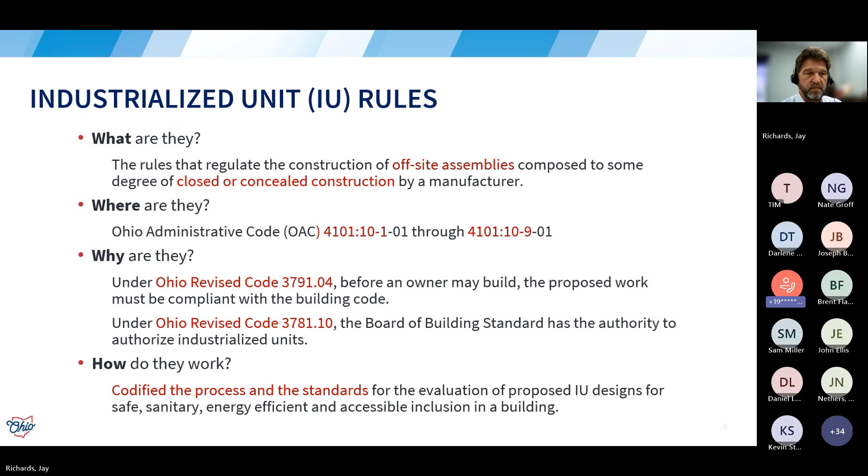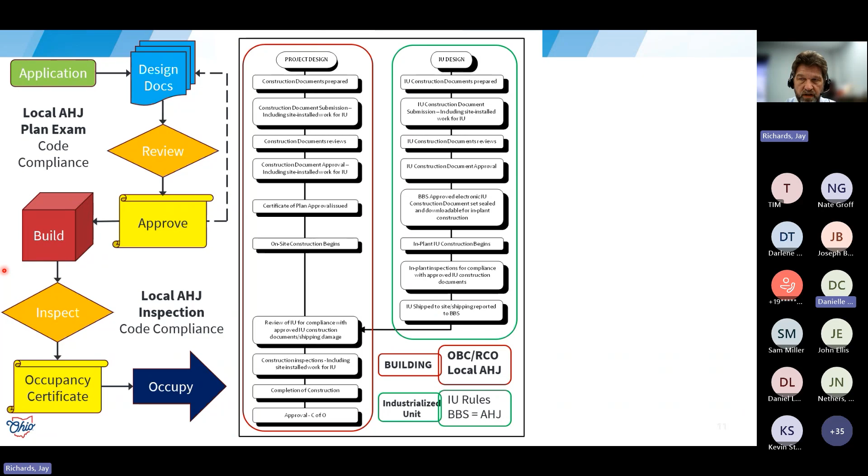Once all those inspections are satisfactory, a certificate of occupancy is issued for the owner to be able to occupy that building, and that allows them to make use of that building. That includes the installation of an industrialized unit. So you can see that the processes are very similar. We were trying to be intentional about that, because we're complying with the same set of codes, those same requirements, and it's ultimately going to all end up as part of a building. We wanted to keep those processes as similar as possible.

So this is a flow chart that I developed to help me understand where it all comes from. We have Ohio law over here that gives authority and responsibility to building departments, the Board of Building Standards, and actually has requirements for owners as they're looking to construct, that they have a process to go through. Ultimately what the owner wants to end up with is down here, a certificate of occupancy, that what he's proposing to do is safe, sanitary, energy efficient, and accessible.

Now, along the way, he has to make sure that he's using either listed and labeled products or alternative materials or an alternative engineered design. But the model codes don't really take into account, at least not yet, they're working on it, that concept of offsite construction, these industrialized unit models.

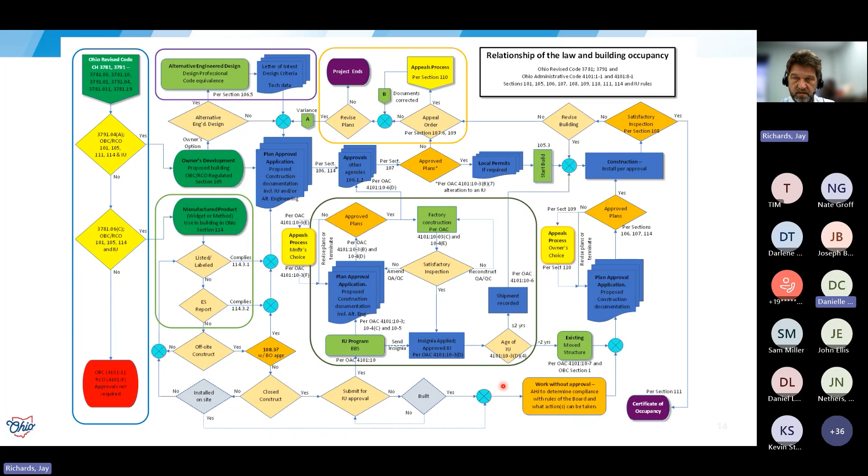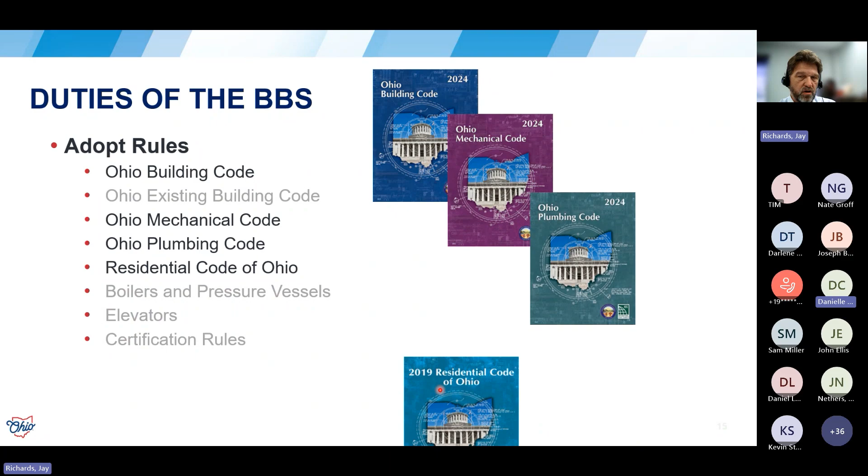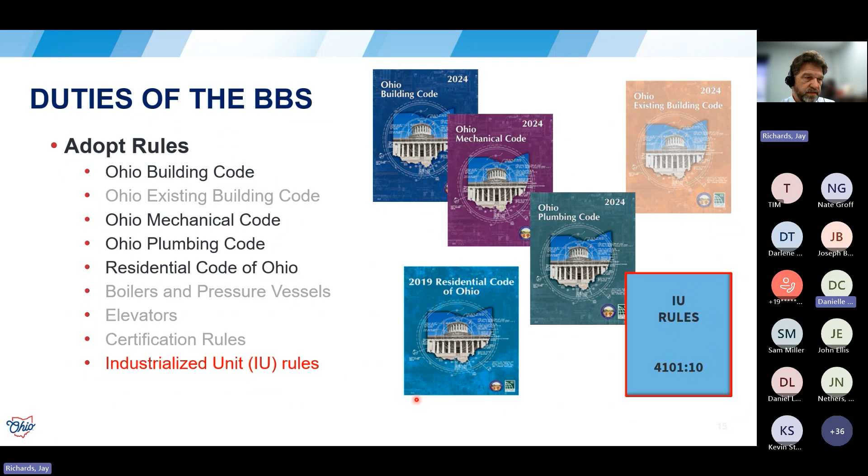So the board has the authority and responsibility to write the Ohio Building Code, the Mechanical Code, the Plumbing Code, the Residential Code of Ohio, and we also have now this year for the first time the actual Ohio Existing Building Code, and we have these new IU rules at Ohio Administrative Code 4101:10, and the primary focus there is looking out for safety, sanitation, energy efficiency, and accessibility of buildings.

We have organized the rules in 10 chapters. I know it's 10-1 through 10-9, but you'll notice that 10-4 has an 01 and an 02, and I'll get into that when I get there. So we have title and scope, definitions. Chapter 3 is going to talk about the manufacturer's participation. Chapter 4 is the authorization process, both of them. Chapter 5 is construction documents. Chapter 6 is about transportation. Chapter 7 is relocation and reauthorization. Chapter 8 is about fees, and Chapter 9 is about third-party inspections.

Under the admin rule, it's basically what is the scope of these rules, what's in, what's out. There's some exceptions in there. We talk about our intent. We talk about our jurisdiction and what is the board's role, and I've gone over all that already. Definitions. The one thing I didn't really talk about, I talked about what an industrialized unit was and closed construction, and thanks for the question, Jay.

And industrialized units are actually, in our mind's eye anyway, a portion of a building. The building is actually the thing at the site of intended use that meets all the requirements of the building code, from the peak of that ridge to the bottom of the footing, and has a certificate of occupancy or is entitled to a certificate of occupancy from the local building department.

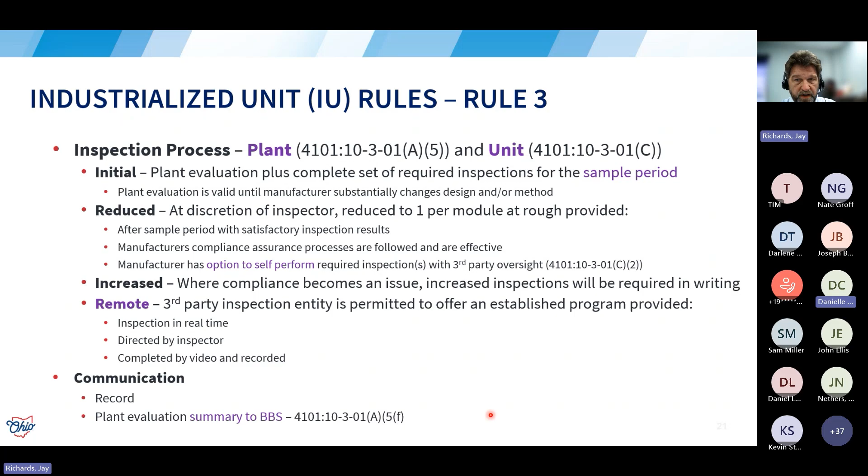There is responsibility on the communication side to keep record of the plant evaluation and the inspections, and the plant evaluation summary needs to be sent to the Board of Building Standards. These are essentially responsibilities of that third party inspection entity. They're going to be the record keeper. They're going to be responsible to send that plant evaluation summary to the board.

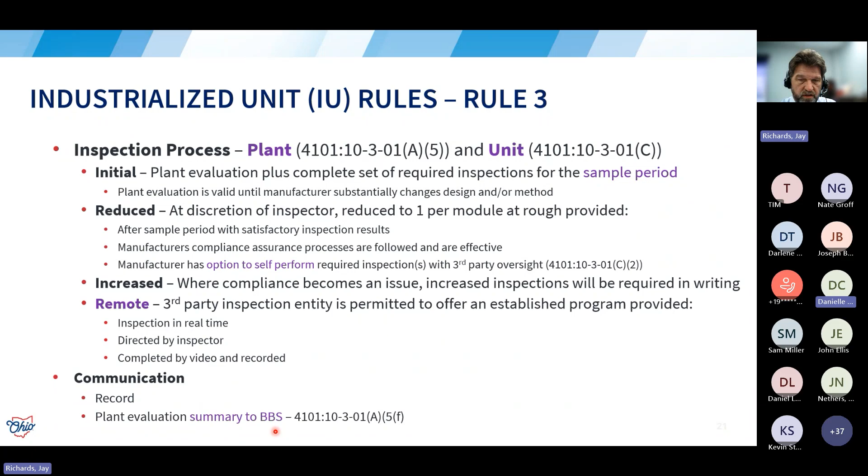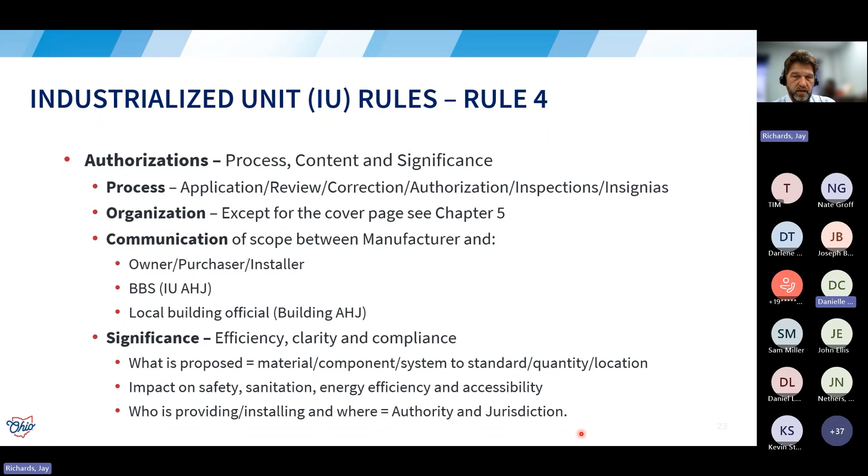So I started talking a little bit about this, that efficiency, that clarity. We need to know what is proposed by the manufacturer, the materials, components, the systems, the standard, the quantity, location, how much of this building that the owner wants to build they are producing in the factory. And we're looking for the impacts that it has on safety, sanitation, energy efficiency, and accessibility. That's what the rules are all about.

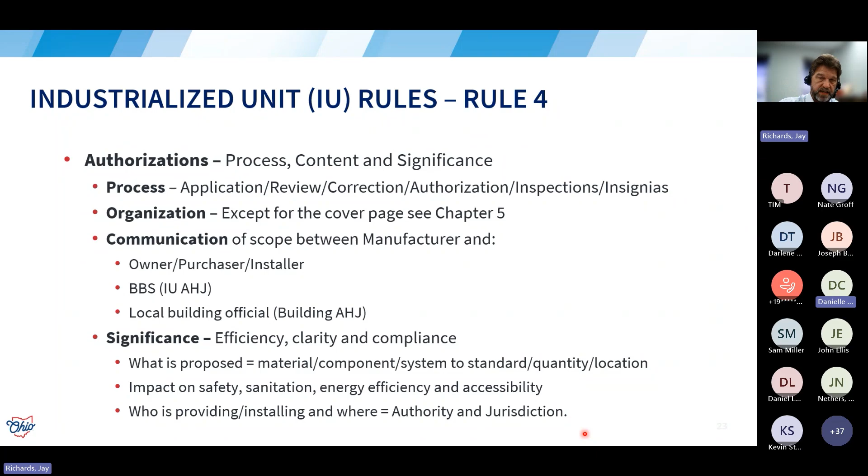And then that communication between the two authorities having jurisdiction to enforce the rules of the board or the building codes in the state of Ohio. So in the process, again, in chapter 4, there's an application that's made. We again identify the applicable codes. The submittals are checked for compliance with those codes. That review is an iterative process.

You can either be compliant right out of the chute, or you may be non-compliant, and we have two responses for issues of non-compliance. A correction letter is the most common, and it's just a communication to try and get more information and help us find where the information is located. It might be there, it might be an oversight on our part, might be an oversight on the manufacturer's part. It's all about keeping that communication going and finding those answers.

Or where a manufacturer may want to appeal an issue, we can issue an adjudication for them. Once compliance is achieved, authorization is issued, we stamp the drawings and we lock them. Once the fee is paid for any additional review time, the manufacturer will have access to those stamped and locked authorized drawings. Already talked a little bit about the alternative review process.

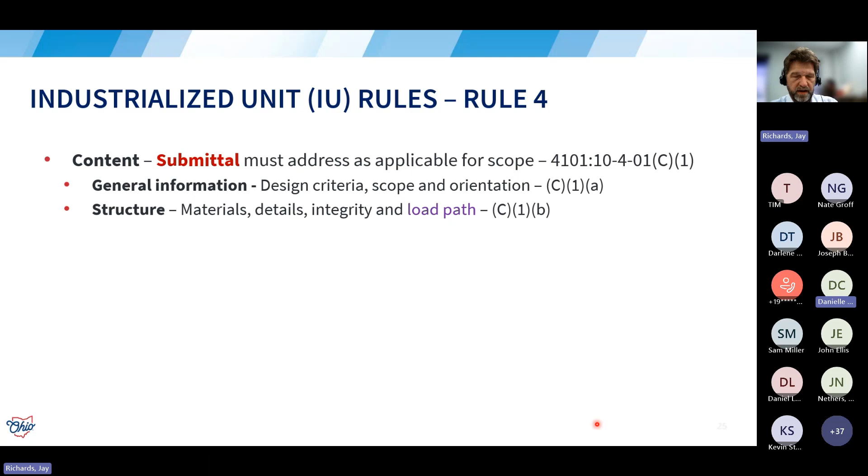The first thing we're going to look for is the structural part, what's holding it up, what's keeping it together, what's resisting the loads imposed. What are those materials? What are the details? How does it maintain its integrity? What is the load path?

And then once you have that structure, now you're starting to look at those fire safety systems, because I have a structure, now I have people in it, now I have to be able to get those people out. I need to be able to slow or stop or compartmentalize the spread of fire and smoke. There may be some other life safety features that come into play depending on the occupancy that IU is going into. What are those various protection systems? How is that IU addressing the risks presented by fire?

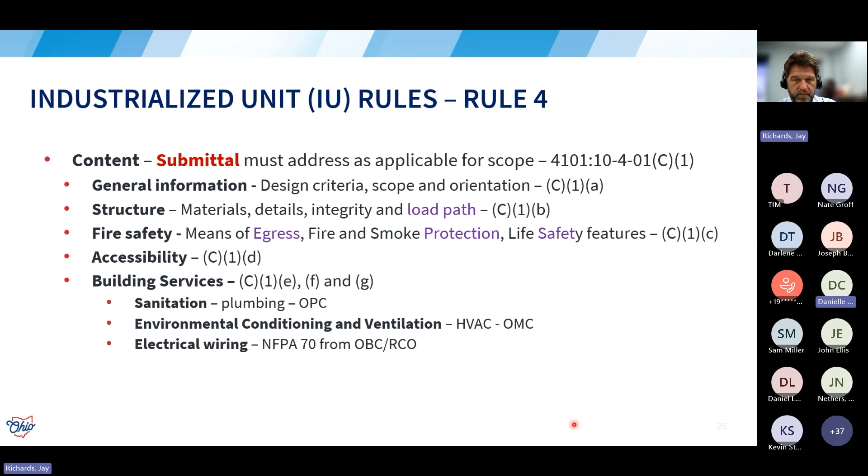We'll look at accessibility if accessibility is necessary. We'll look at the various building services. We'll look at the sanitary services, the plumbing. How does it comply with the Ohio Plumbing Code if it has any plumbing systems provided in it? Environmental conditioning, if it has any heating or cooling systems in it, how do those HVAC systems comply with the Ohio Mechanical Code? Electrical wiring systems, same thing. They'll be evaluated against NFPA 70. That's referenced out of either the Ohio Building Code or the Residential Code of Ohio.

We'll look at energy efficiency and how that works. One note here, you always have the ability to comply with the prescriptive requirements. So you just put the tabular value of thermal insulation in, and you put your air barriers in, and you do that stuff. Or if you want to do some kind of alternative trade-off or performance, in that case, you would need to also include a COMcheck or a REScheck for the trade-off part.

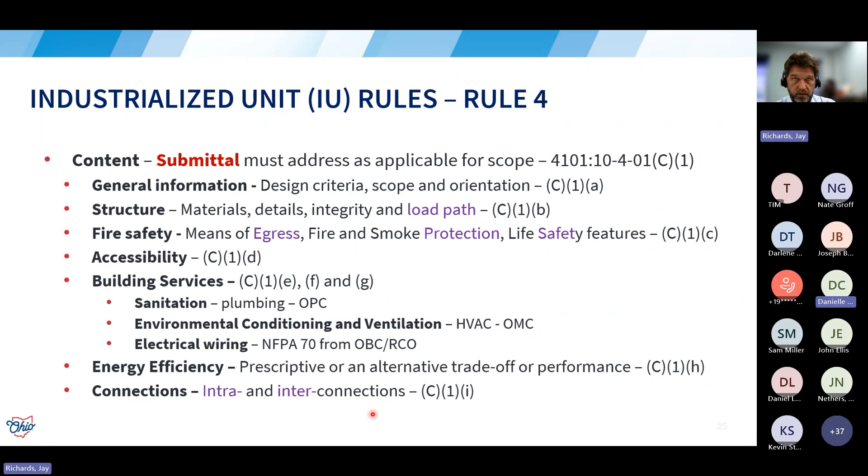Or if you're relying on a simulated performance or an ERI performance evaluation, you would need to include those tools to show how your IU fit into that, so that the owner knows what they need to provide on the back end to finish that off and be energy efficient. And then also we're looking for connections, those inter and those intra connections, intra between the modules themselves, inter between the module and any on-site construction.

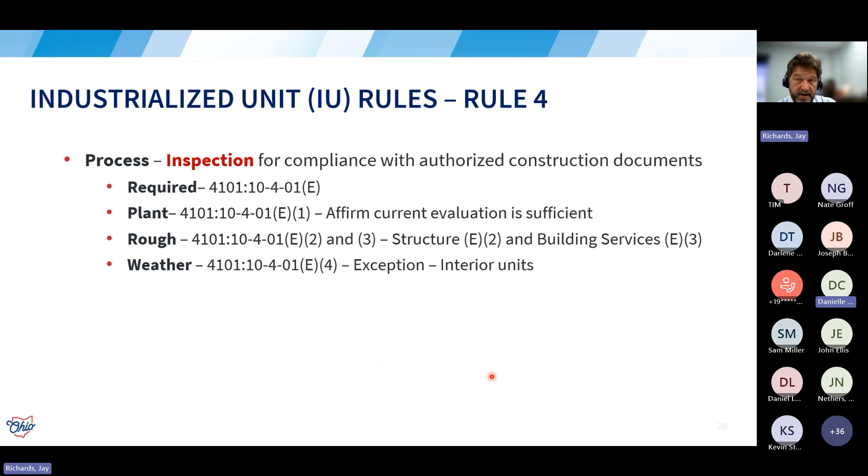So the process of inspection, there are required inspections. There's the plant, there's a rough-in inspection for structure and building services. There's a weather inspection for those units that are proposed to stand outside. If you have an interior unit, there's an exception for that.

Insignias of subassemblies. So we have some situations where manufacturer A builds an IU and they have an insignia on it. It gets transported to manufacturer B. They add to it and they have their own approval and their own insignia. So the third party will look for that first insignia. The local jurisdiction at the site of intended use is only going to look for that last insignia, the latest insignia.

If there's any testing required, those reports have to be audited, that they were conducted and had satisfactory results. And then a final inspection, basically everything's closed up the way it was supposed to be. And then on-site inspections are really more focused on those inter and intra connections and making sure we have those identified.

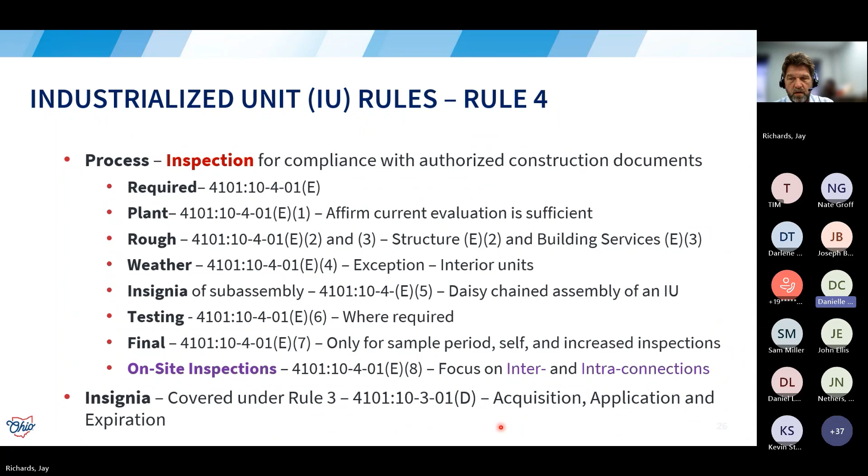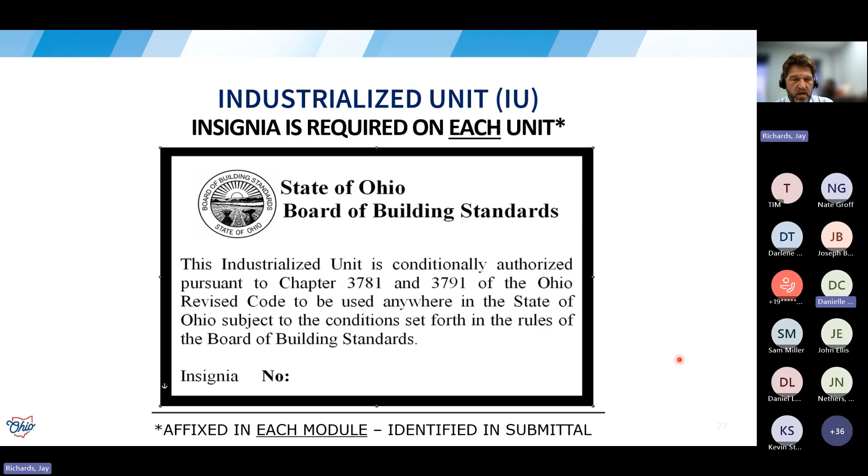This is a picture of the insignia that we issue, or at least it's the one we currently do. We are in process of getting some new ones. They're going to have some new branding and slightly different language, but they're basically the same as this.

As I mentioned before, Rule 5 is recommended organization. It's an attempt for us to try and get some standardization into this process. With more standardization, there can be more efficiency. We start off with things like on the cover sheet. We want to see that design criteria, those design assumptions, any limitations. What is the scope of work?

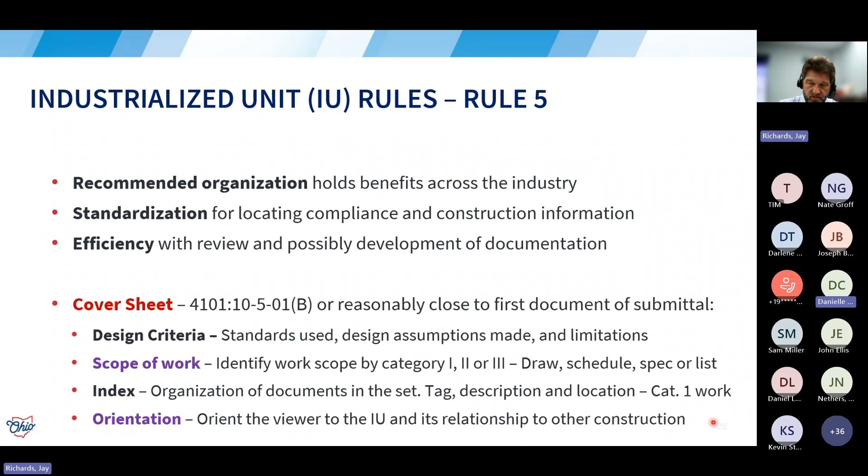We've worked to establish a scope by category on the scope of work, and I'll go into that here in a little bit. An index of the sheets that are included in the drawings, and if necessary, some kind of orientation so that we can understand how big this industrialized unit is and how the modules fit together.

So the scope of work and the buckets. This is going to be determined by the manufacturer, and there's 3 scopes of work. There's the scope of work that everybody's used to. It's that factory assembled part. This is what the manufacturer is proposing to provide. That's what they're putting together in their plant.

I'll jump down to category 3. This is the other bucket that you've heard us talk about in the past, and that is, what does the owner need to provide to complete this installation at the site of intended use? Oftentimes that's going to be things like foundations and utilities, but it can be far more than that. We have some manufacturers where the owner is providing all the exterior siding. They might be providing the roof covering. They may be doing some of the insulation process.

Then that middle bucket, this category 2 bucket, is going to be a new one. It's a little more refined, and this is going to work with options that we are hoping to make available to manufacturers to make their authorizations a little more robust. And that is, these are going to be things that the manufacturer has designed. They have submitted them to us for approval, but they are not necessarily installed at the plant. They may be shipped loose items. They may be, I'll say this, incomplete in some fashion.

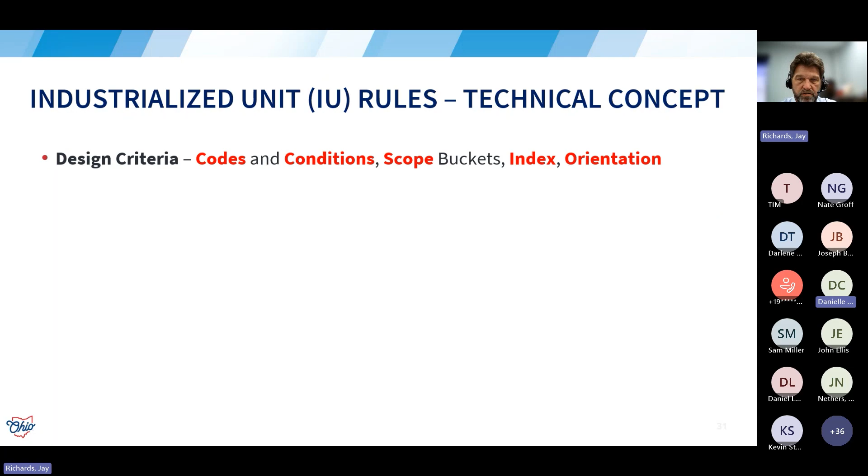I think we talked at length about a lot of this stuff, but basically the design criteria, you're identifying the codes and the conditions that are applicable. We want to see what those scope buckets are. We need an index of what's supposed to be included in the documents that are submitted through the IU portal for us to review. You'd be amazed at how many times either there's additional sheets and additional information that's not in the index or vice versa, and it helps us understand the scope.

Again, identify whether you're going into a residential building or a commercial building by identifying either the RCO or the OBC on the applicable and current edition. The modules, panels, or the whole unit, identify whether this is a single unit or multiple modules. We're really looking at this kind of content and these kind of categories, and we want to punch up the connections.

The mate line, identify where they are, help us understand whether it's an interconnection or an intra-connection with the detailed information. For example, the manufacturers that are not putting any kind of exterior siding on have a mate line at the outside of their building. The owner has to finish that off with something to protect it from the weather.

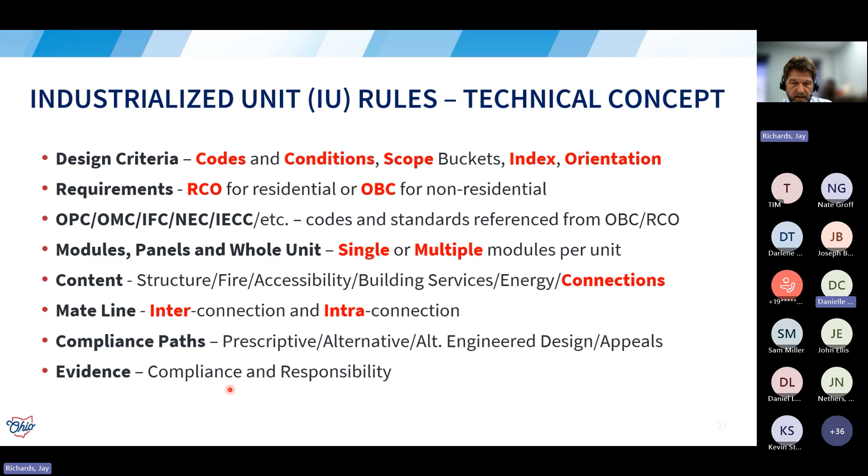So I was just looking at ways to kind of also describe the various rules that we had put together. Coordination with multiple authorities having jurisdiction, Rule 1. The beauty in Rule 3 is that with one authorization, you can have multiple reproductions of that same module. Also in Rule 3, we have some inspection and authorization flexibility.

Rule 6, you'll find it's a transportation chapter, but part of that is where you'll find shipping report requirements. So when you apply an insignia as a manufacturer and when you transport that, you'll have a responsibility to fill out a shipping report and upload that through the IU portal. That shipping report is the tool that ties together the authorization with the insignia number, with the serial number on the particular IU module, with the site of intended use.

Certificate of occupancy is issued by the local AHJ for the building. That includes the installation of an industrialized unit. Once that certificate of occupancy is issued, it becomes an existing building. And that's clarified in Rules 3 and 7. Relocation and alteration is in Rule 7.

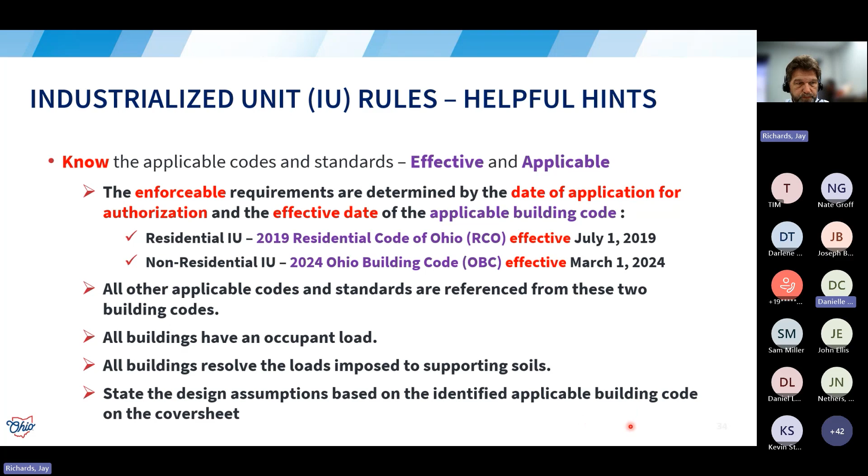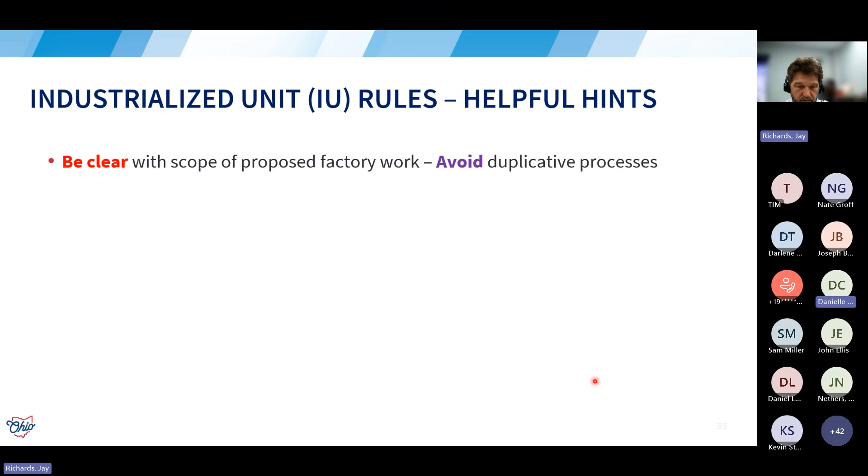So be clear, and this is really about avoiding that duplicative process, that review process, that inspection process. We really only want to do this once. The simplest method that I can come up with about this is the manufacturer only puts in their document what they are proposing to assemble in their factory and provide it to the owner. It seems pretty clear. We'll review what's there.

I do understand and I do grasp the concept that sometimes context has value, and that if it is necessary to put context in, or you as the designer or the preparer of the documents feel it's necessary to have that context in there, even though it's not provided by you as the manufacturer, do your best to differentiate that part from the IU assembly. Identify that it's by others. If you can identify which others, whether it's an owner or another IU manufacturer, which would be an odd case, but it does happen. Yeah, you can try to do that.

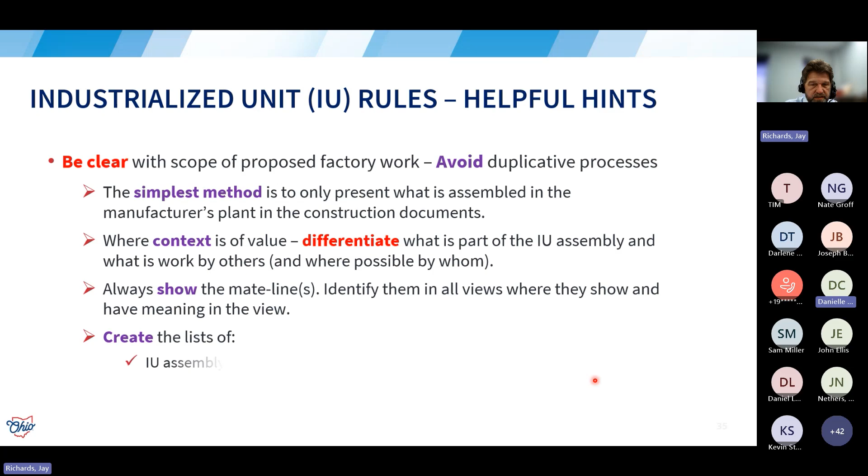Remember to create those lists of the portion of the IUs that are assembled at the site, where they're just inspected by the local AHJ. That's bucket 2. And then there's bucket 3, which is the work required by the owner to be able to install that IU. And that's going to be work that they need to take to the local AHJ, the local building department, and have it approved and inspected by the local AHJ.

We recently had a manufacturer call us and say they were trying to have a unit installed, and they were turned down by the building department. As we were digging through it, and we still have to confirm this, it sounds to us like the purchaser didn't do this last bit of work, like didn't provide how it connected to the ground, connected to the adjoining structure, how it was getting its building services. It had some building service needs to support its operation, and none of that information was provided. So we think there was a little miscommunication there that caused some issues.

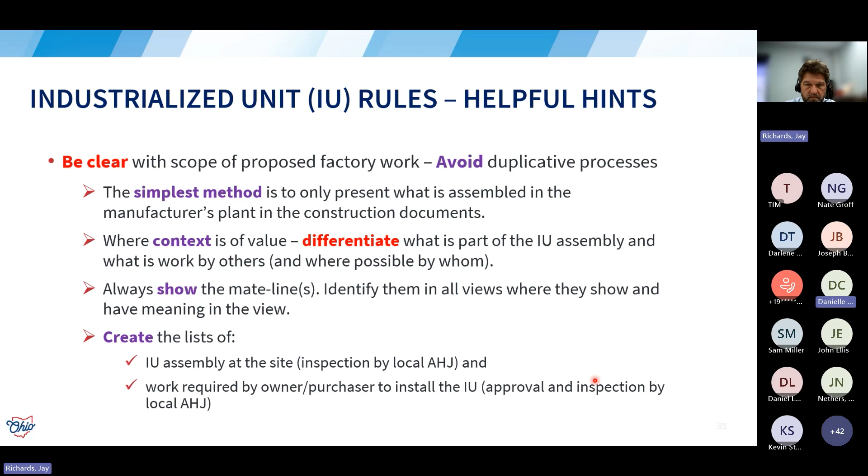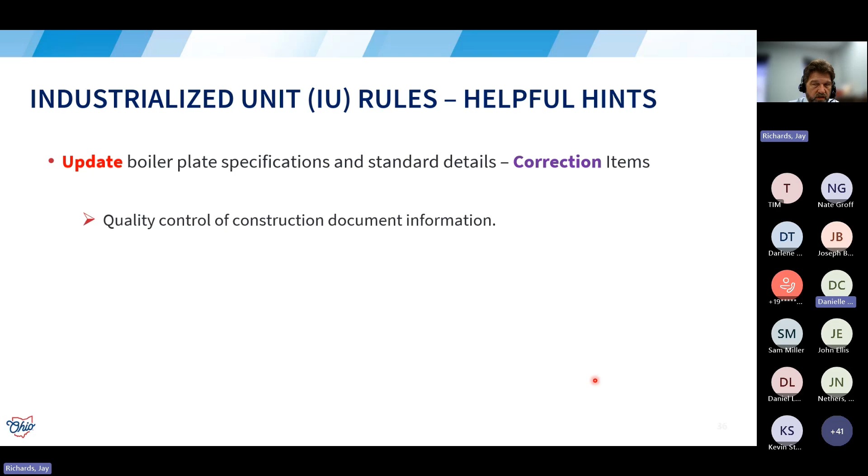Update. This one's going to be pretty quick. On the boilerplate specification and standard stuff, particularly if you get a correction item on it, do a little bit of quality control and get the construction document information up to date. The other thing that we run into is sometimes boilerplate specifications have been attached to a project coming here to Ohio, and they reference codes in Florida or California or some other states, Texas, sometimes from some northern states, but rarely. So watch that boilerplate language that you might have in your construction documents.

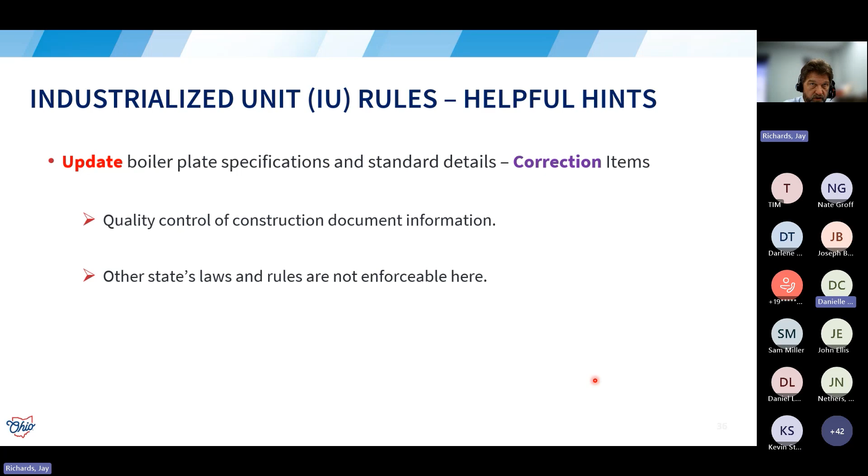Probably the worst example we've had is the same manufacturer would submit us construction documents, and we would get out the first correction letter from the last review, and the first 12 items were duplicated on the correction letter for this one because they were all boilerplate comments and they were never updated or changed. So they just copy straight across. It doesn't take us very long to do, but it was mentioned once already, and when you have to mention it again, now it has to go through another review cycle. Whereas if it were cleaned up, they might have been able to get an authorization straight through because maybe those 12 items were the only 12 items in the correction letter. So if you do use boilerplate specifications and standards and standard details, I would urge you to make sure that they're up to date. Maybe you don't check them every project, but at least on a regular rotation.

Recommendation to follow Chapter 5 organization, particularly on larger projects. Bookmarks help us tremendously to move through those pages. Couple of things. Chapter 5 is just a recommendation. It's our effort to standardize the organization of this information, working towards efficiency. Again, it's not a requirement. You can locate information in places other than what shows in Chapter 5, but be prepared, there may be some inefficiencies there. If we're unable to locate it in a reasonable period of time, it may become a correction item on the correction letter, and the answer might be, well, go back to a page or a detail later in the set to find that information. And if that information's there, fine. We'll accept it there, not a problem.

But we're really trying to set up this notion of getting ourselves a roadmap through the information in these construction documents. We need a complete understanding of the IU, and we need to travel through it. And getting us that roadmap works really well. Mate lines are important for that. That's one of the fastest ways for us to understand where we are. Section and detail references: coming out of a plan, going to a detail, coming out of a plan, going to a section, coming out of a section, going to a detail, from a building section going to a wall section. Tell us where to go, where we're going to find more information.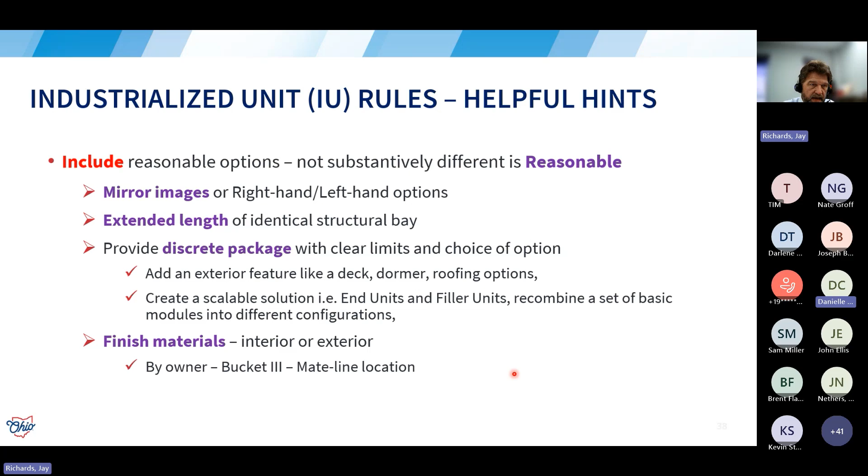Finish materials, I mentioned this a little bit. You might have different options in finished materials, both interior and exterior. You might have the option that the owner is providing them. That's bucket 3. It may have a mate line issue because they may need to provide more than just the finish. They may need to complete the insulation package, things like that. You could offer owners choices of things that don't have code compliance impact, color options, pattern options, other aesthetic kinds of things.

There are potentially choices that the owner can make that do have some code impact. A brick finish veneer is a lot heavier than a vinyl wall cladding. Are all the things in place to be able to do that? Is the structure able to carry that additional load? Are the relief angles in place? Things like that. Is it a thin brick that just glues on rather than a full 3 5/8 inch mortared brick? Sometimes those are best handled with that discrete package option.

We are going to go back to allowing the development of construction manuals or systems documents. If you are a manufacturer that makes use of a tool like this and wants to make use of it with us, we're letting you know that construction manual or system document needs to be on file with the board.

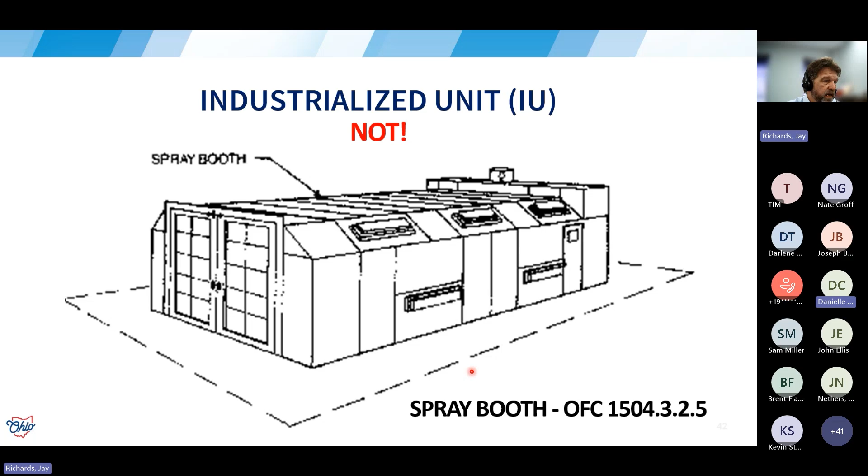Spray booths, they have a reference in the Ohio Fire Code under 1504.3.2.5, and we do not look at spray booths through the industrialized unit program. We have generator equipment where there's a skin around a generator, and it's pretty much skin tight. It has kind of reach-in access only. We look at this as equipment. We don't look at this as a building. So generally, this is regulated by the local building department, and they're looking for listing and labeling of this generator to an equipment standard.

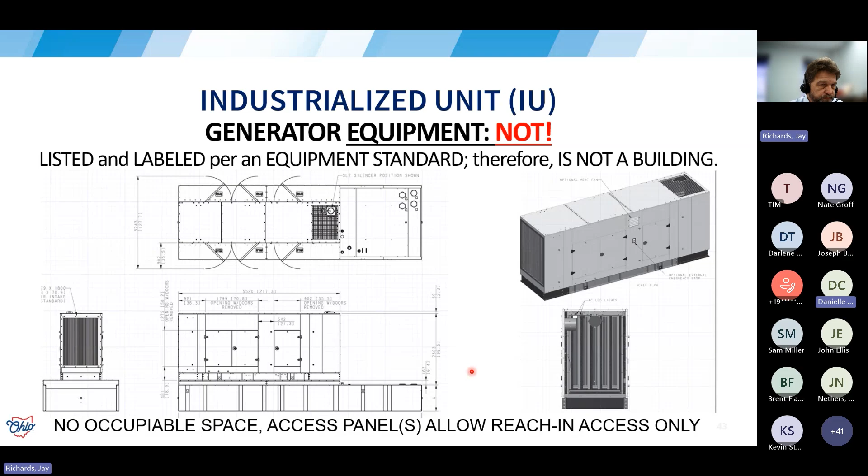Conversely, we have submissions of generator buildings. And this meets the definition of a building for us. It does have floor, walls, roof, columns, foundations, with or without the other parts. And it is there to basically accommodate, house, protect the property of the generator. And it has additional premises wiring system going on inside. There's a little bit of heat provided in there. And so we do consider this a building. We do regulate it as a building. And with the closed construction that's represented in other drawings that this plan came with, it is a good candidate to come through the IU program for consideration.

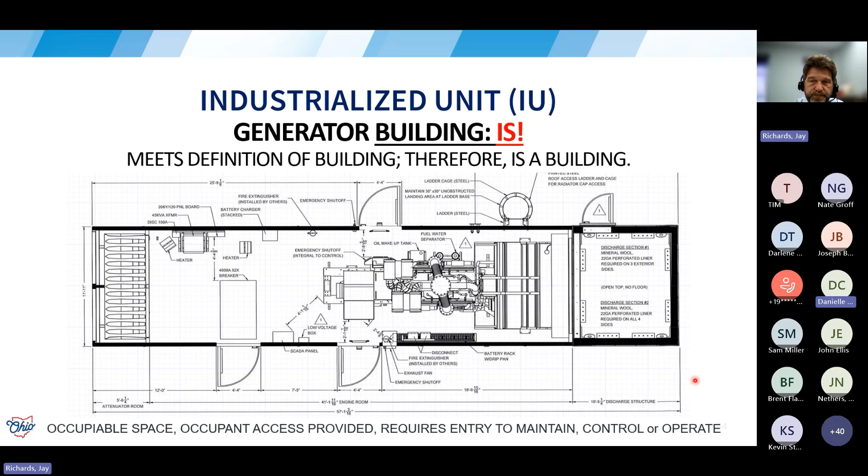In industrialized units, this kind of started addressing the open and closed question. Image over on the left is all fairly open. It may be finished on one side, but you can see all kinds of the structure and what's going on behind the wall and the backside of the finish. That could be shipped as open construction to the degree I can tell from this limited picture. The picture on the right, they've started to cover up the piping with insulation, so we don't know what the material is there unless by chance there's something stubbed up out of the top. There's a potential that this might end up being closed construction. For sure, if you have the pipes in and you start insulating all that and you put finished material on there and you've closed up that wall, now you are in the closed construction world.

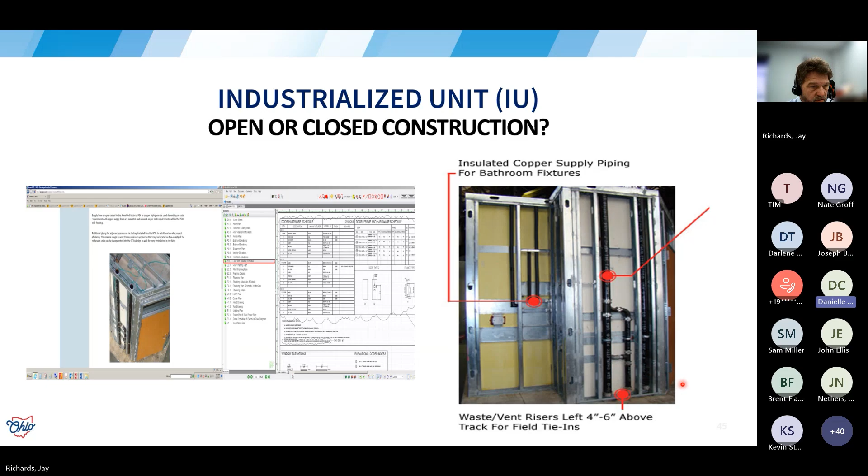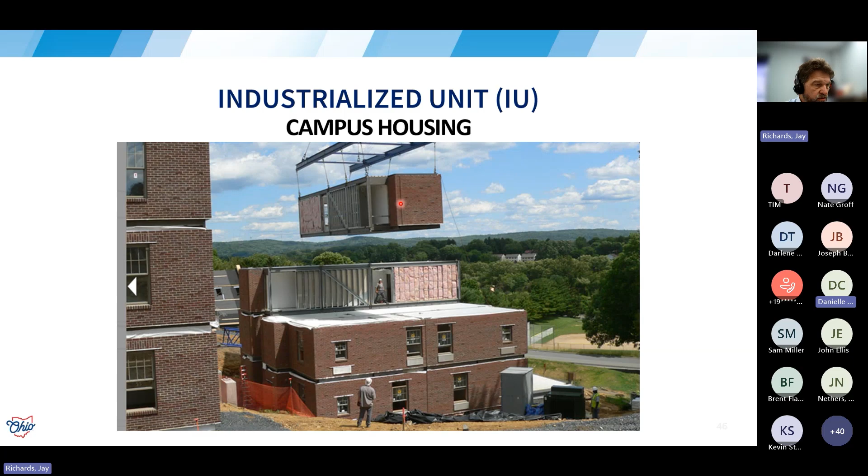Nothing stopping you from making units that stack, go up in the air, multiple stories. There's some pretty wild projects going on in Ohio with industrialized units. One of the things about stuff like this, where you have multiple units, there's no way that the manufacturer can do the energy testing required to look at leakage performance and stuff like that. So for energy efficiency and compliance with the energy code requirements, there are some things that the owner is going to have to do to finish that.

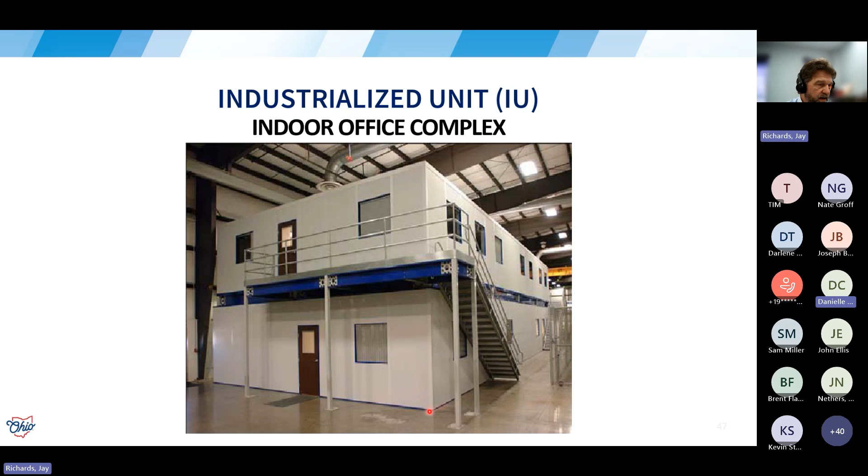Industrialized units can be indoor. This one happens to be an indoor office complex. You do get relief from having to have the same energy efficiency requirements. You still have like the lamp efficacy minimums for the lighting that goes on in here, but you don't have the thermal barrier issues with an indoor unit like this one. You still need to have that load transfer though. That load path still needs to finish.

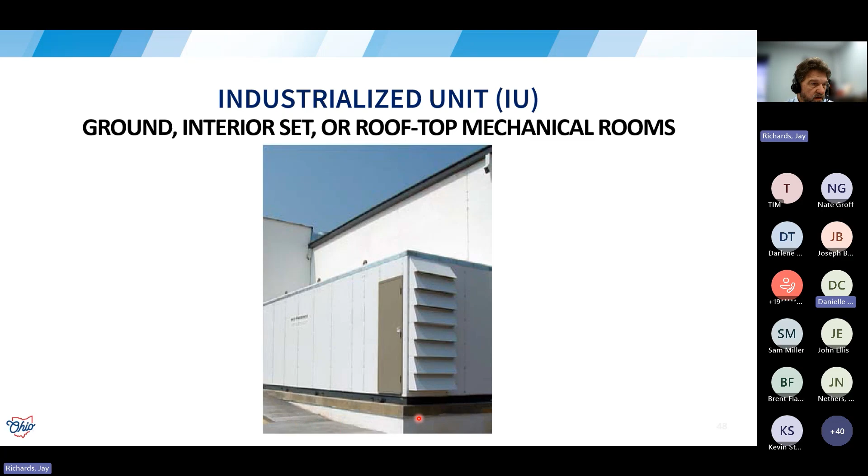Industrialized units up on rooftops. They can be standalone beside a building, up on a rooftop. In the case here being up on a roof, that owner needs to know what the load of that unit is to make sure that his roof structure can support it, transfer those loads down through the rest of that building. This was kind of an interesting one because in this case, this bottom portion was the industrialized unit and this top portion is all open. And so this was submitted to the local building department for site work, and then we looked at these bottom units for the compressor locations.

It was always kind of a question to me, if we have three sort of identical boxes that have all the same basic stuff in it, was there a way to look at one of these boxes and get an authorization? And they ended up making 3 of them with maybe some slight variation on this one wall, and then hooking them all together at the site. So one authorization produced 3 modified examples. It didn't go that way. It was submitted with one industrialized unit that was comprised of 3 individual modules.

A case like this might be a good example to also talk about. Each one of these modules is required to have an insignia on it because it will transport separately from the others. Each one has its own serial number. The overall thing, a duplicate of this, it's another whole unit with these 3 pieces in it.

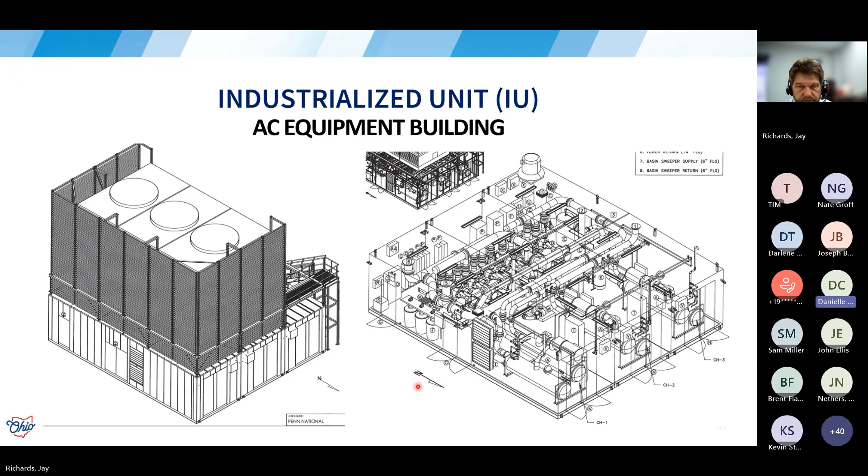Relocatable structures. So yeah, you get the industrialized unit installed. It gets a certificate of occupancy as part of a building. It's now an existing building. The owner has to maintain it in accordance with its approval to maintain its certificate of occupancy.

If they're making any changes to it, like a change of occupancy or altering it or putting an addition on it, they have to make application to the building department to get approvals for making those kinds of changes. The Ohio Existing Building Code will regulate that for non-residential buildings, commercial buildings. Section 113 of the Residential Code of Ohio will regulate that for residential buildings.

If the unit is being moved or relocated, whether it's a single unit that's a standalone and you're going to pick it up and move it, or whether it's multiple units and you're going to move all the units, or whether it's a unit that got incorporated into a larger structure, larger building, and you're going to move some or all of it, you go to the Ohio Existing Building Code, Chapter 14, Moved Structures, and you end up having to comply with those requirements.

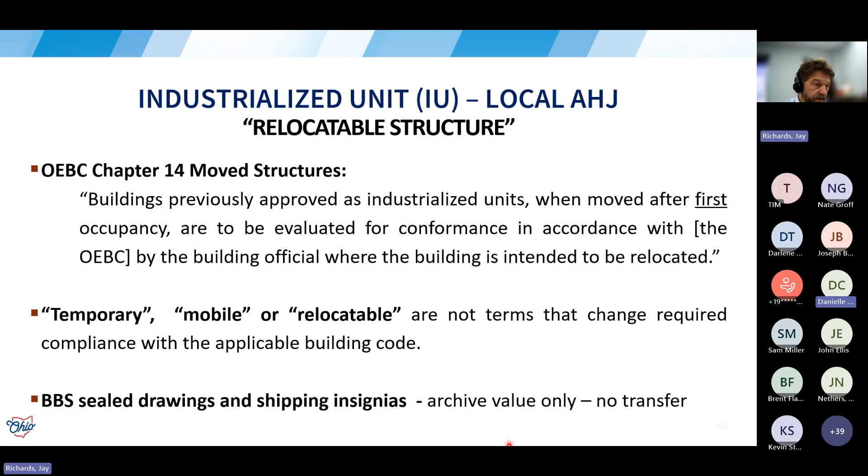So the owner who is proposing to develop their property with a new building, and that building they intend to use an industrialized unit as a minor part of it, half of it, a major part of it, maybe almost all of it. They still need to go to their local building department, make application for plan approval. When they submit the documents, they need to indicate on those documents that they are intending to make use of an industrialized unit, provide some idea of scope of that industrialized unit.

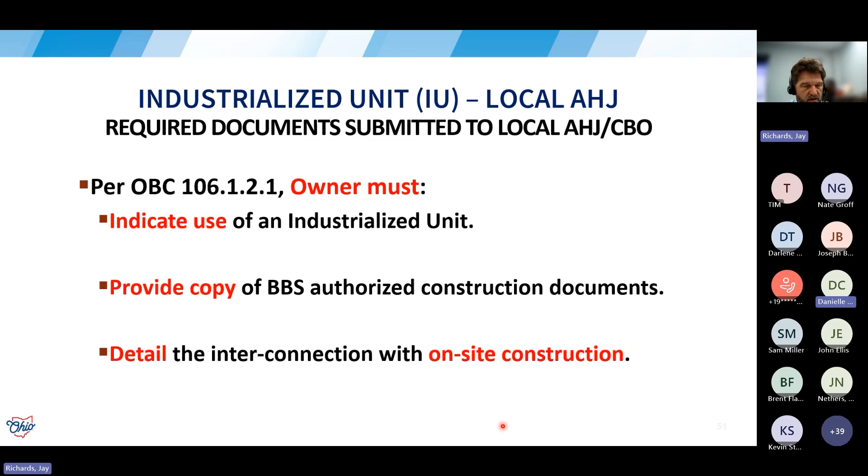Before the unit arrives on site, they have to provide a copy of the BBS authorized construction documents to the building department, and they need to provide any detail information on the interconnection with any on-site construction that isn't already detailed by the industrialized unit manufacturer. And then, of course, any scope of work, any construction that they're wanting to do beyond the actual industrialized unit on their site of intended use. So this is the owner's communication tool, and this has been in the code for a very long time. So it's nothing new.

The local building department has inspection responsibilities relative to the industrialized unit. That unit arrives on site. They need to verify that it has valid insignias on each modular unit. And remember, I mentioned that back with those chiller compressor buildings. There's 3 modules there, and each one of those modules needs an insignia on it.

They're looking to make sure that the IU matches the BBS approved construction documents, and by that I mean in general design. It's not going through a thorough check. It's like, okay, is this what this customer ordered, and do these drawings match what they got. Verifying those connections to any of that on-site construction is one of the things that the local AHJ has to inspect.

So those interconnections between the modules and foundation systems, those intra-connections between adjacent modules, the completion of weather protection systems if it's an exterior unit, the maintaining of fire rating if you have a fire rated assembly and there's a mate line that runs right up through the middle of it that needs to get closed to maintain the detail for that fire rating.

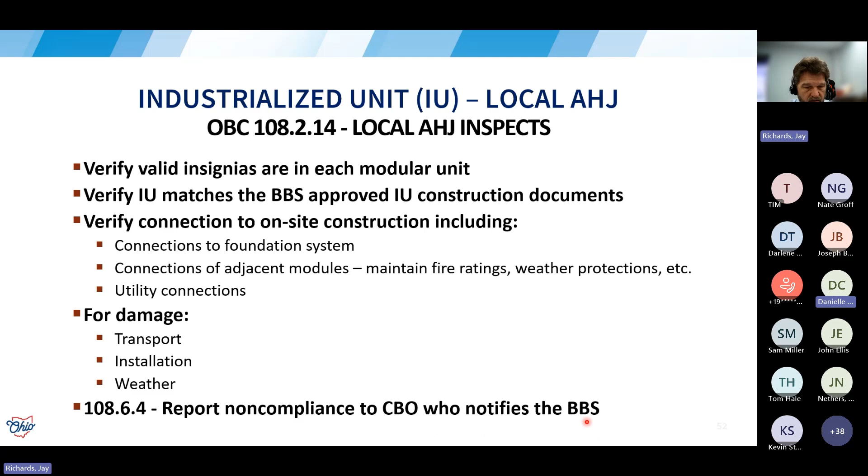Anytime this has happened, that I've been in my position, the manufacturer has already been made aware, and they are already working on a solution to fix it, because it is the manufacturer's responsibility to deal with any damage that's occurred from transport, installation, or poor weather protection. At least in my tenure, this has not been an issue. Manufacturers are all doing really well towards getting good, solid products out there.

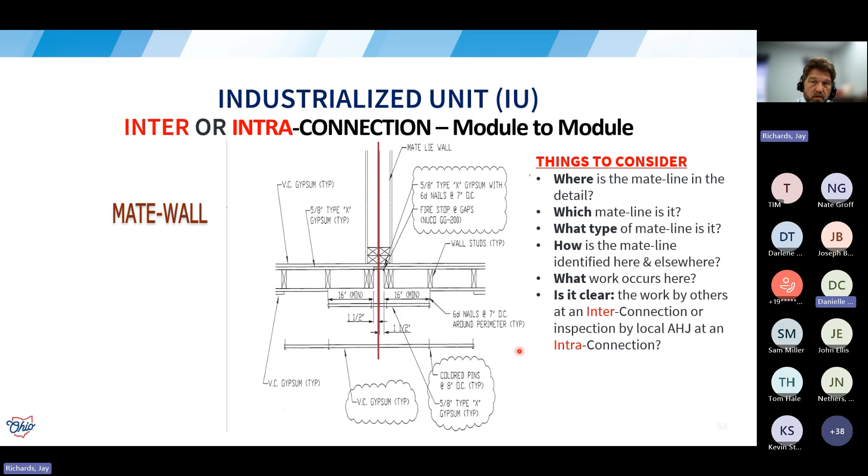So I'm at my last slide, and I'm more than welcome to answer any questions that people have had along the way. I didn't see any hands raised other than there at the beginning, and I appreciate that the question was asked and hopefully answered, and there weren't additional questions.

Yeah, Mr. Stevens. Hey, so my question is basically about changes and amendments. Is there an official process to submit any amendments? Our owner pretty much wants to change the building every other day, so. Yeah.

So we can do amendments, yes. It's again going to be on a case-by-case basis. It's going to depend on the scope of the amendment, and discussions with you as the manufacturer, whether or not you want to change the authorization going forward, and everything you produce from that point forward is going to be with that new amendment, or whether you want to have options within the authorization, and whether we can do that

as a discrete portion. Or whether it would just be better because of the scope or scale of the amendment to actually make a separate application and develop essentially a second model that you could produce. Yeah, that is closely based on the first model.